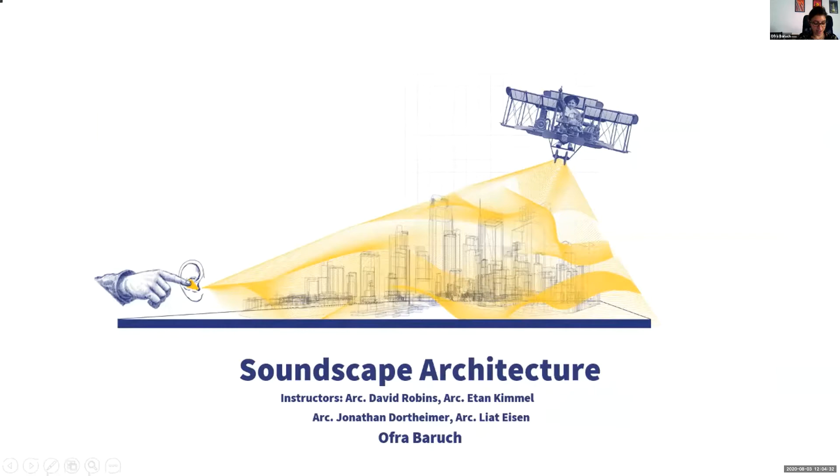I'm Ofra, and my project deals with architecture and its connection to soundscape. Our lives are always present in a sea of sound and voices. In the right architectural space, the human voice or music can be transformed in a way that can inspire faith, bring tears, and ease emotional pain.

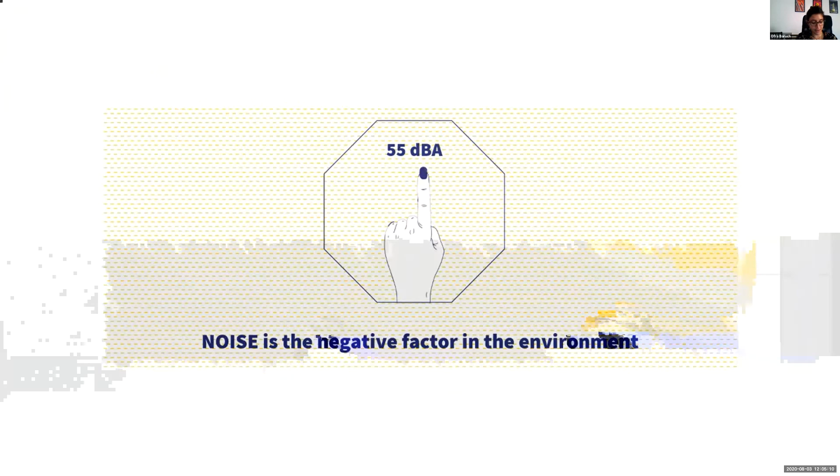Noise is an important aspect of the quality of life in the city and in general. Therefore, we should test the consequences of extreme noise nuisance. Over 55 decibels, noise is a negative factor of the environment. And as the noise increases, the negative reaction worsens.

The noise causes stress reactions, nervousness, attention problems, impaired activity in open spaces, feeling of helplessness, uncertainty, and impaired mental health. In general, noise at high intensities causes damage to a person's health, quality of life, and harms daily activities.

In recent decades, there has been a massive impact on the soundscape, and one of the most influential factors is air transport. An airplane approaches the airport, touches down on the runway, progresses to the terminal, discharges people, is refueled and refilled, taxis toward the runway, takes off, and departs to another destination. During each operation, the aircraft emits a high-intensity noise that significantly affects the soundscape.

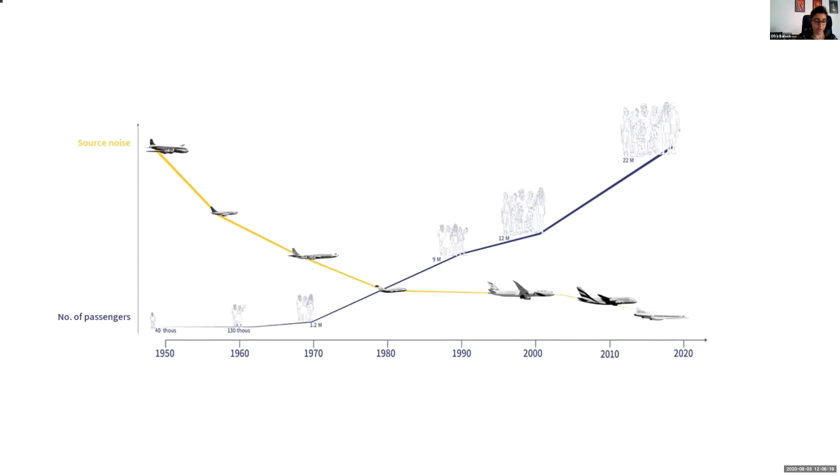So even though over the years the source noise has been reduced, the number of passengers and flights is steadily increasing, so the nuisance exists and probably will not go away in the coming years. At first, I wanted to examine how the nuisance issue is tackled.

From investigation conducted on the environment of airports around the world, it can be seen that there is usually a layer of land uses that serves as buffer zones. That is, a layer of uses that is not sensitive to noise, such as uncultivated land, industry, and the like. In Israel, there is not enough land to be used as buffer zones.

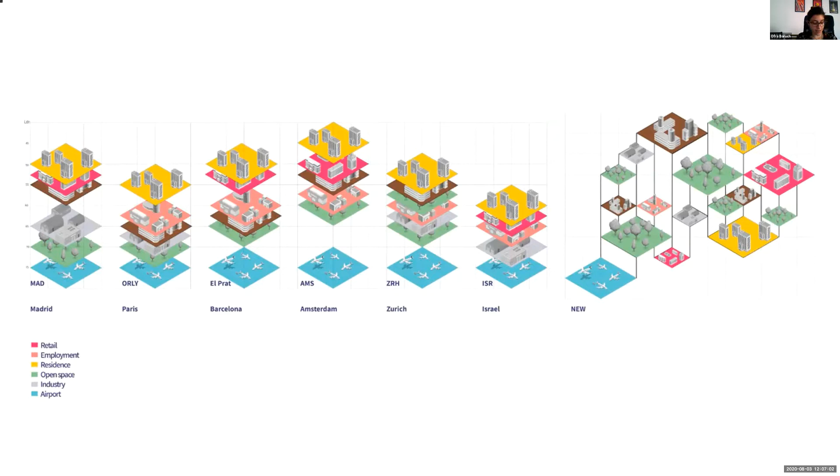My project offers a new insight into the space surrounding the airport, a space that suffers from severe noise nuisance, by dismantling land uses and using architecture to address the issue of living alongside noise.

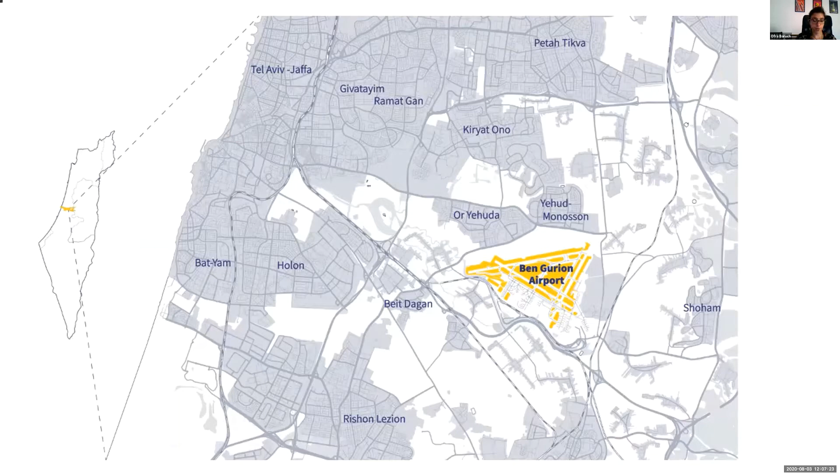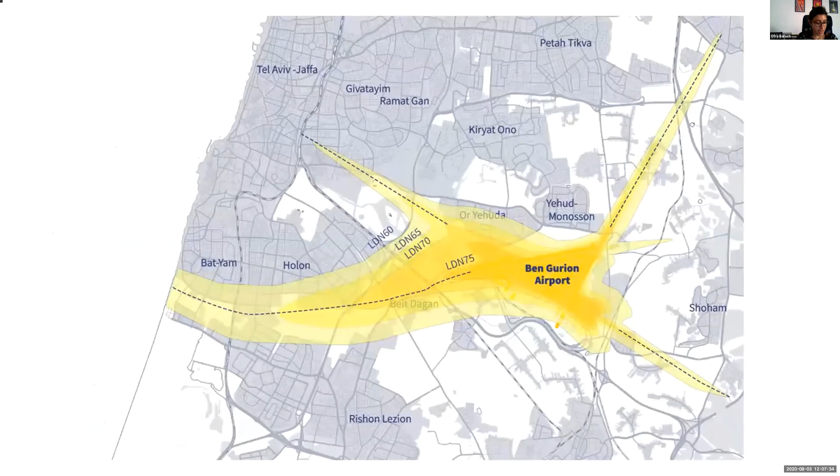In Israel, the largest international airport is Ben Gurion Airport, located in the center of the country. Zooming in, it's notable that the airport, which was established before the state declaration, nowadays is surrounded by highly populated cities and towns which are constantly growing. So, despite the relatively small physical size of the airport, the range of the noise influence is extensive and affects many cities in the heart of the country.

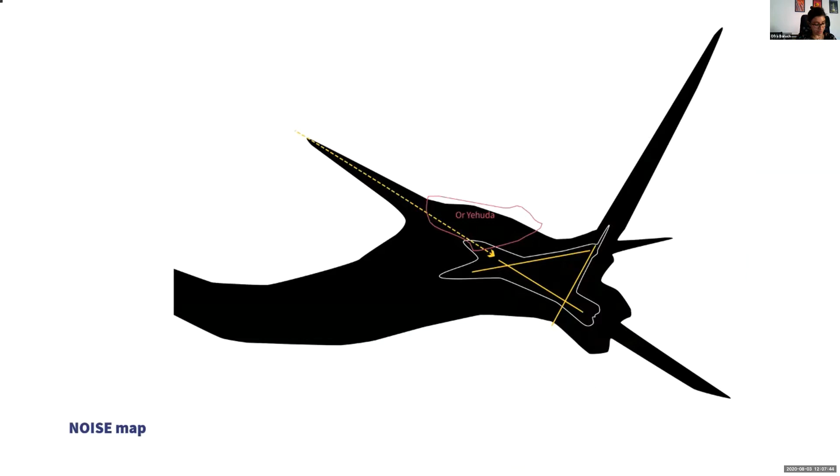One of the cities is Or Yehuda, which is located right next to the airport and is affected by nuisance frequently, as detailed later on. In an environment where many people suffer from high noise levels, there is a regulation aimed at preventing or reducing the impact of the annoyance.

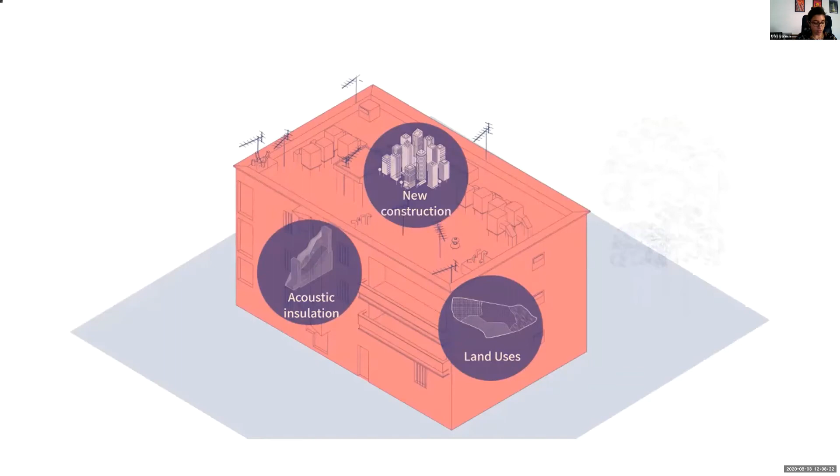In Israel, the regulation refers to areas affected by aircraft noise and defines the following conditions: restricting the locations of sensitive land uses, preventing approval of new noise-sensitive construction, and requiring acoustic insulation in bedrooms. All the regulation solutions are related to the interior only.

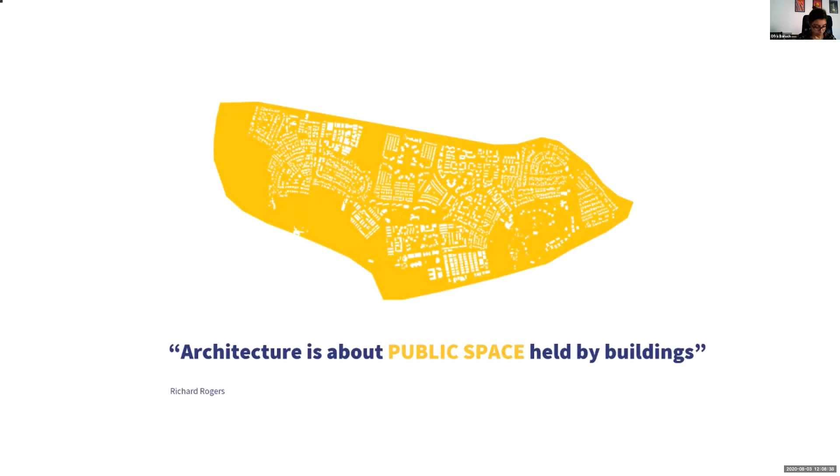By being outdoors, you are surrounded by unpredictable and unseen noise. In fact, there is a lack of any holistic view on the issue. There may be a situation with two neighboring buildings, one of which is eligible for acoustic protection and the other is not. And as we have seen, open spaces will not be entitled to any protection.

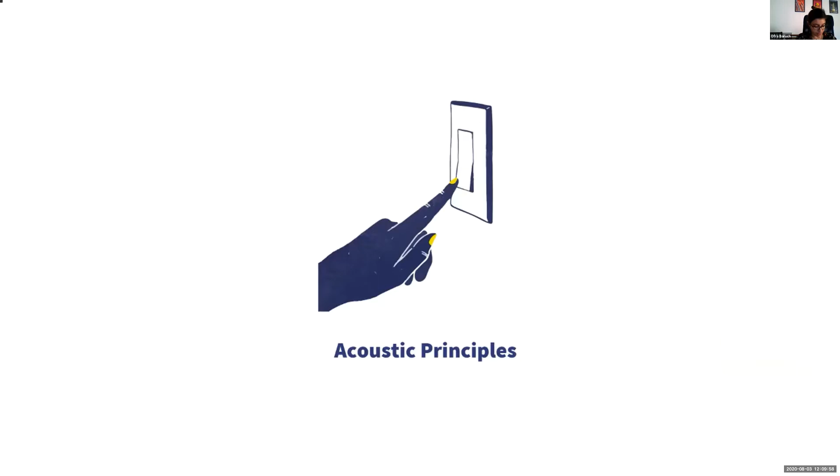Hence, the main question is, how can neighborhoods and buildings be designed to reduce the negative effects of extreme noise nuisance? In order to answer the question, I examined acoustic principles for the urban and building scale. I will review them shortly.

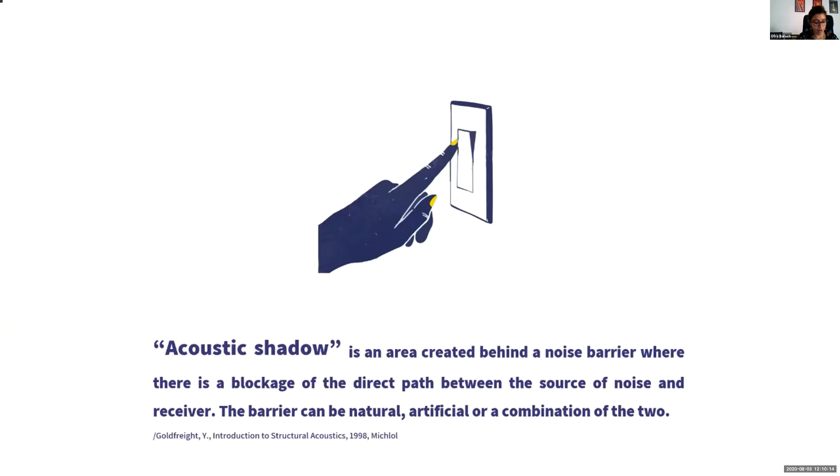The underlying acoustic principle is the acoustic shadow. Acoustic shadow is an area created behind a noise barrier where there is a blockage of the direct path between the noise source and the receiver. The barrier can be natural, artificial, or a combination of the two.

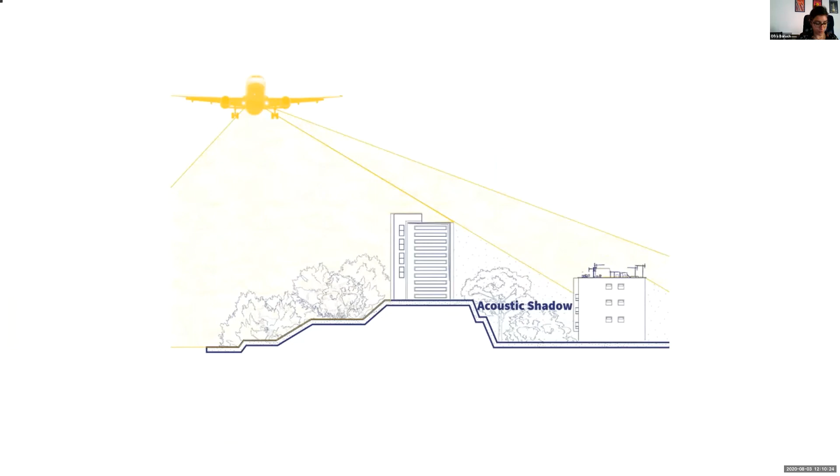The second principle is the building envelope in reference to the noise source, which aims to create protection for the open space near the building and prevent secondary sound repeats.

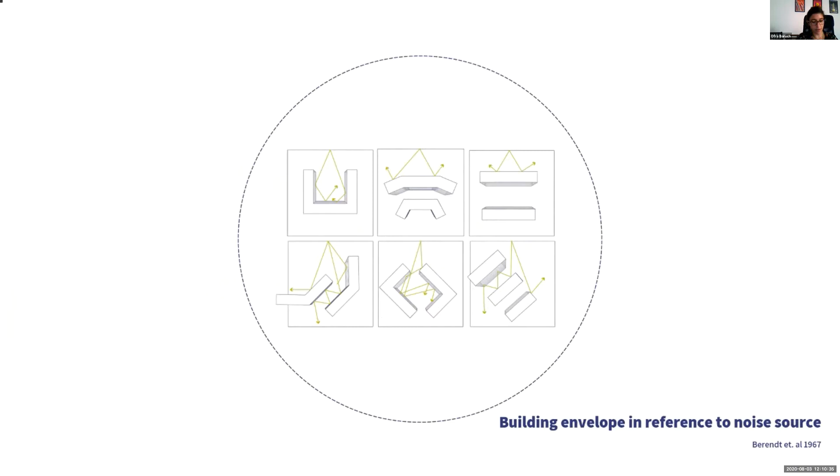The principle of construction height refers to the building's height, aiming to provide acoustic shade and prevent sound resonance.

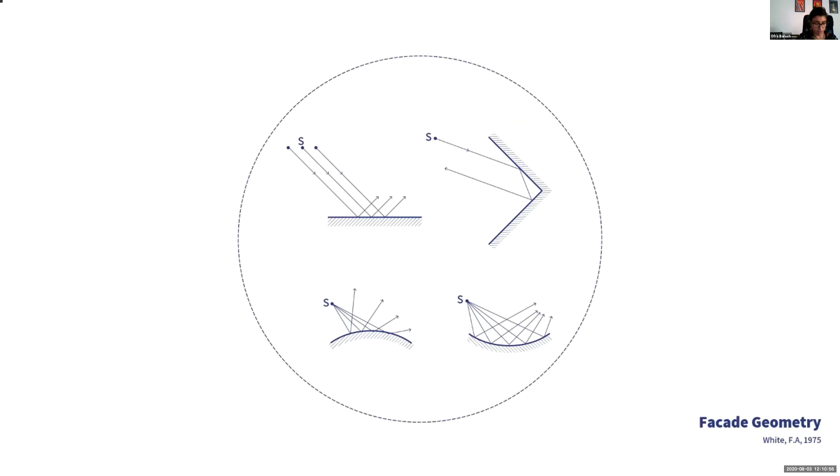The principle of design facade geometry aims to use geometric changes in the facade in reference to the noise source. It can also occur in a smaller scale.

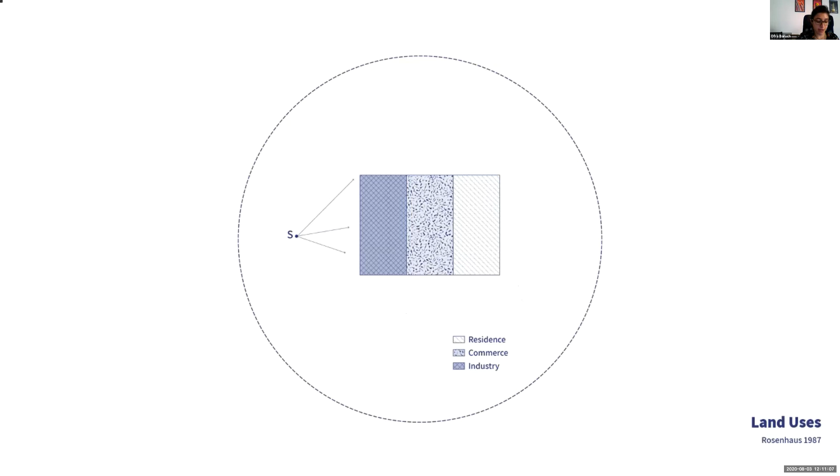As mentioned earlier, limiting sensitive land use planning and planning them according to the source of the noise. Sensitive land use refers to residences, educational institutions, nursing homes, and the like.

The fifth principle is construction materials, which refers to how it affects the acoustic environment.

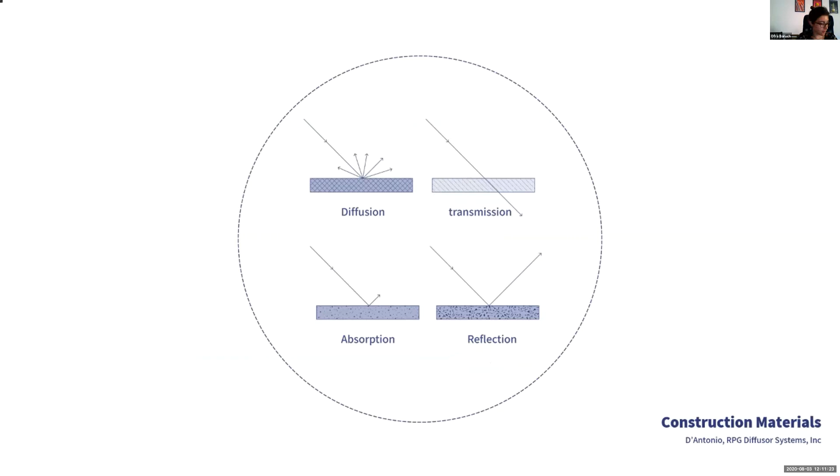There is no planning strategy that incorporates these different principles. Hence, my research proposes a soundscape urban planning strategy.

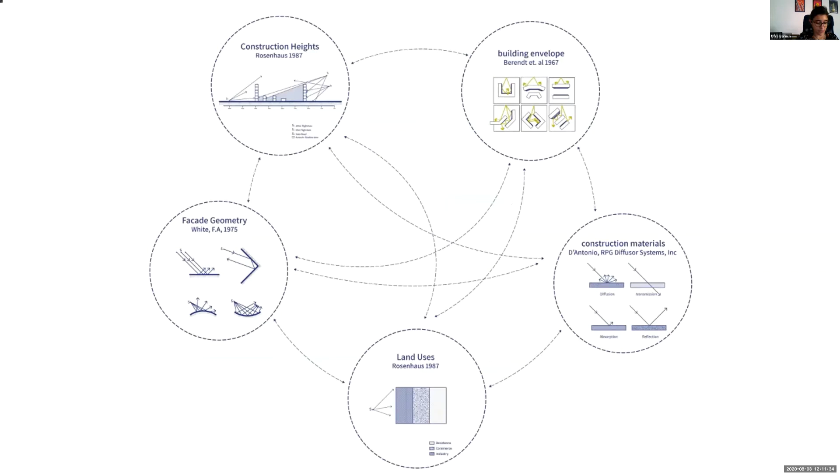I will shortly go through the strategy, detailed by a set of methods presented from the urban scale to the building: the acoustic urban grid, adjusting the urban grid parallel to the noise source direction to increase the potential of the acoustic barrier.

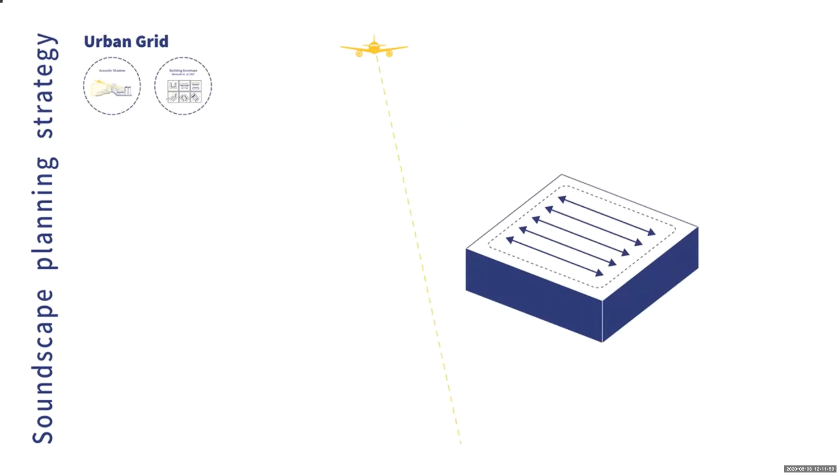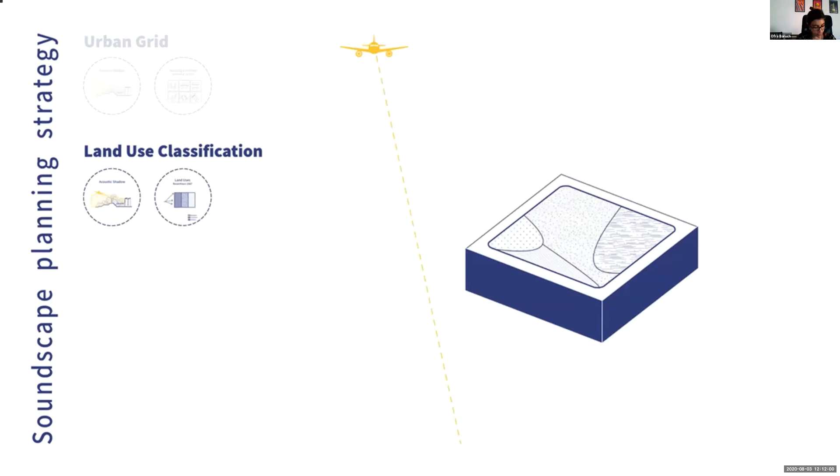Land use classification: on the urban scale, land use planning with reference to the noise source; and on the second scale, a mixed-use building where one use can protect the other.

Acoustic construction characteristics: use of the building envelope to prevent echoing and reverberations.

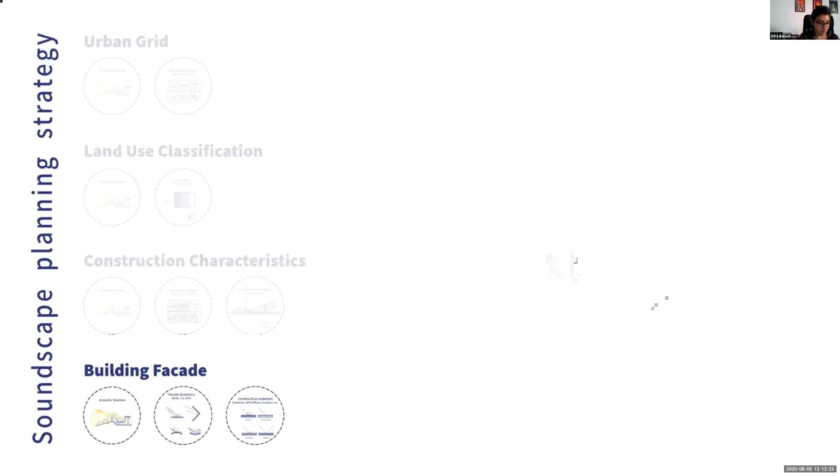The last stage, the acoustic building facade method: use of materials and directing of building facades in accordance to the noise source. And these are the full method working set.

As mentioned earlier, the project focuses on the city of Or Yehuda. I will present it from the urban to the building scale.

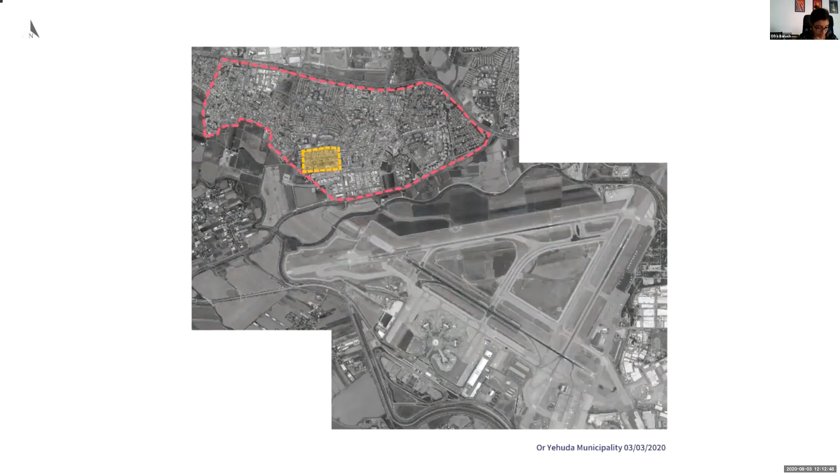According to noise contours taken from the airport's national outline plan, the residents suffer from noise nuisance constantly.

The criteria measurement is LDN. In general, it's the average sound level over a 24-hour period.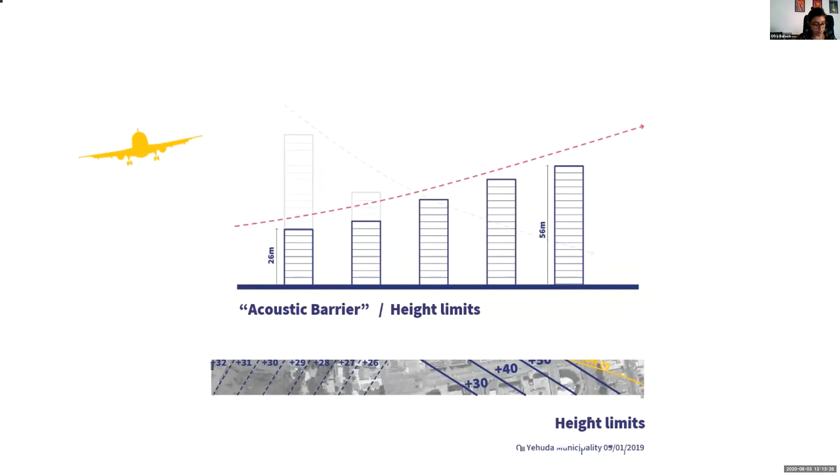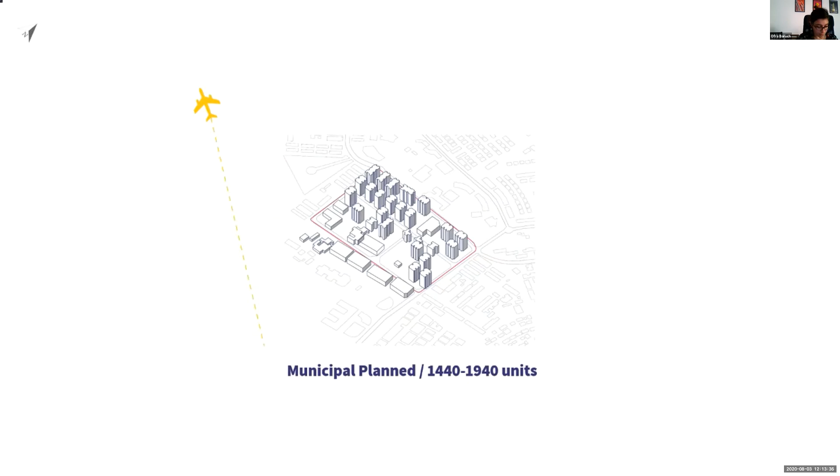Today, the neighborhood contains about 130 housing units, and according to the municipality's future planning, it will increase to 1,500 to almost 2,000 units, where the noise nuisance continues to be significant, according to a simulation done using 3D noise software.

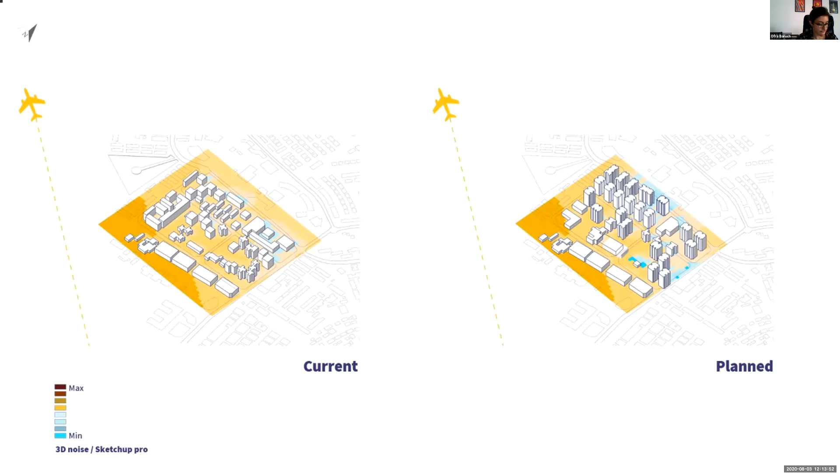Now I'd like to take you through the soundscape planning architecture strategy implementation. I will begin at the urban scale.

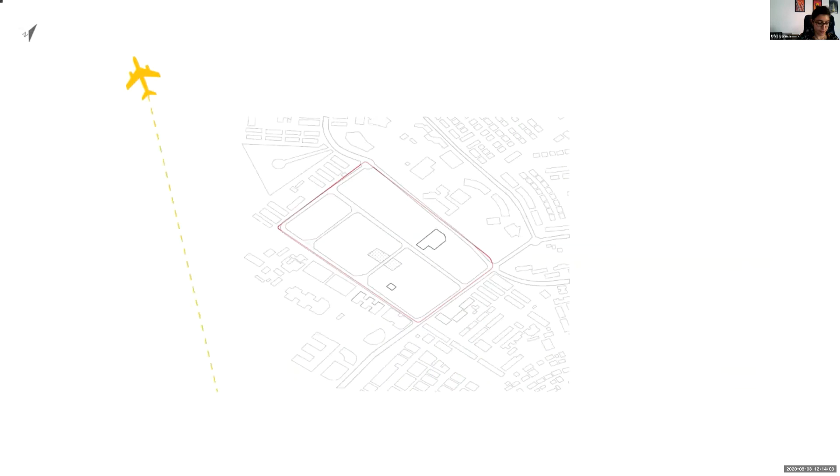This is the planning site, the Asirei Tzion neighborhood. In the neighborhood already exists the mall, a large public open space, educational and cultural institutes, and offices.

At first, we should apply the acoustic grid method. This is the basic acoustic urban grid on the site.

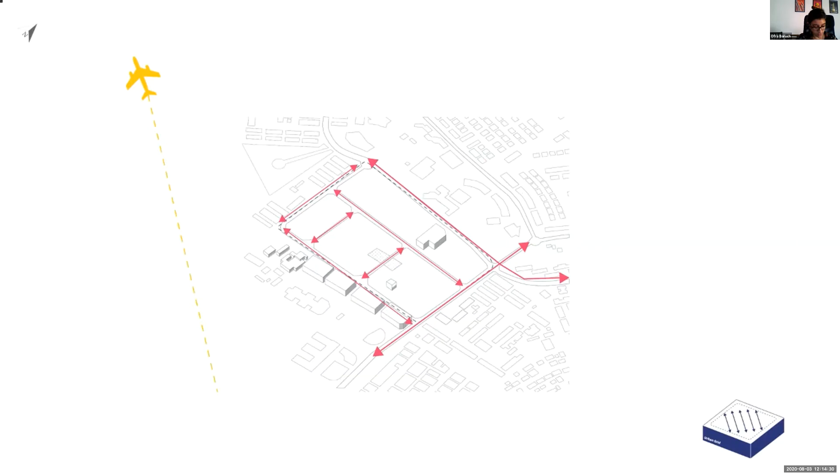At its present state, the neighborhood has an existing grid of streets and roads, and there is a need to adapt to and combine two grids. The combination of the grids produces a new planning system in the neighborhood, containing open spaces for useful, protected, green urban areas.

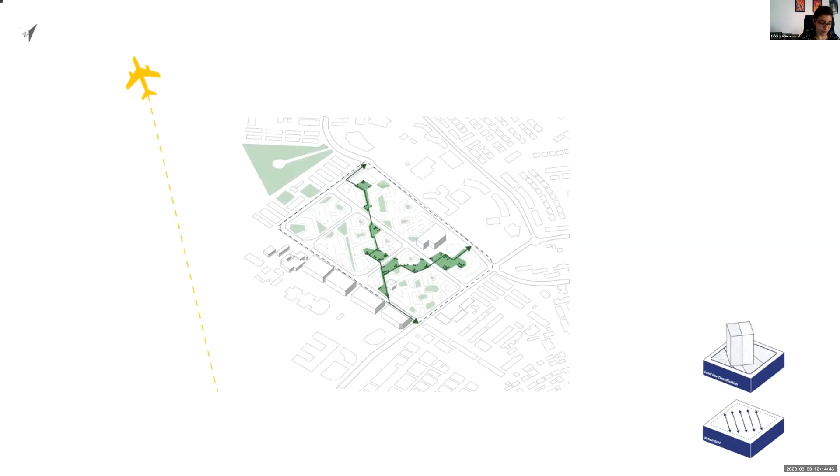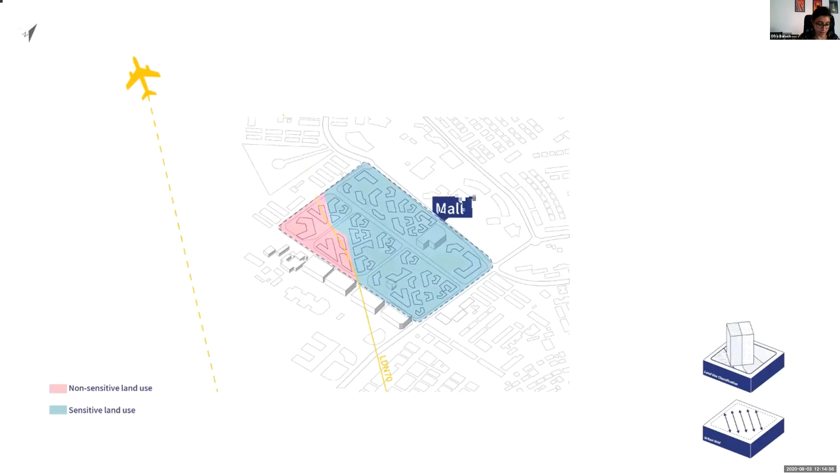The suggested plan is designed under the noise limits: no build of noise-sensitive uses under the LDN 70 line. Accordingly, non-sensitive land use, such as offices, is planned south of the LDN line.

The schematic master plan is designed according to the height limits and by maximizing the acoustic shadow.

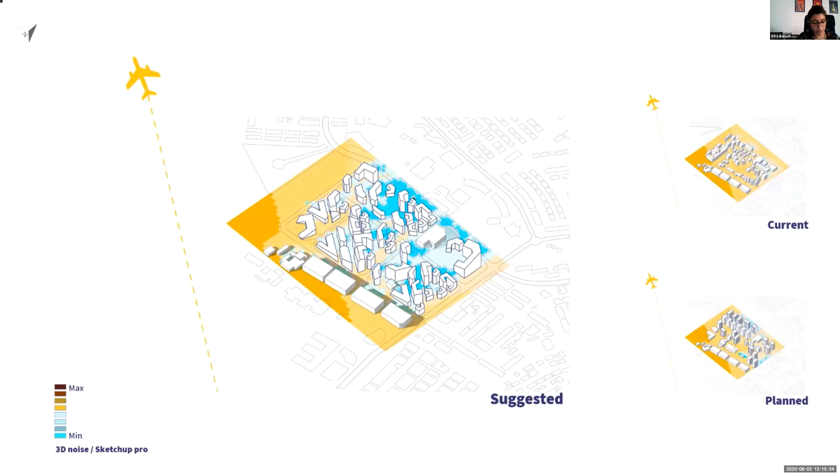Examining the planning scheme using 3D noise software, it is notable that the suggested scheme is more efficiently noise protected. It should be stated that the test results based upon the 3D noise software are rough, since existing tools do not address architects. Therefore, an architecture-fit software for soundscape performance is needed, such as Ladybug for sunshades.

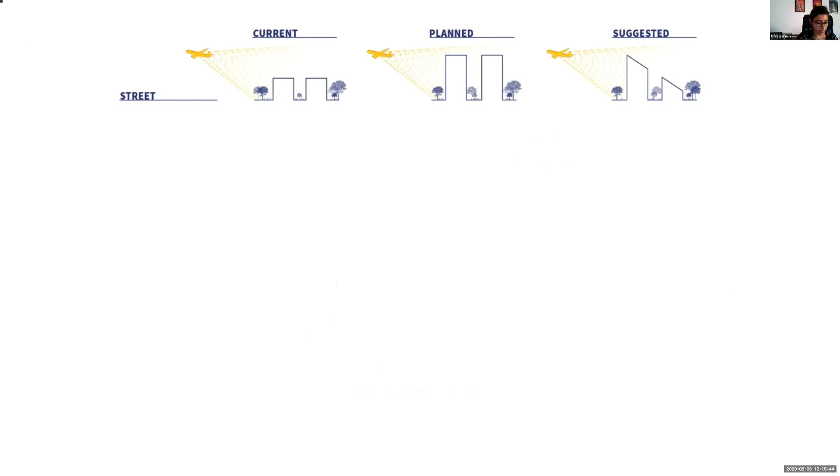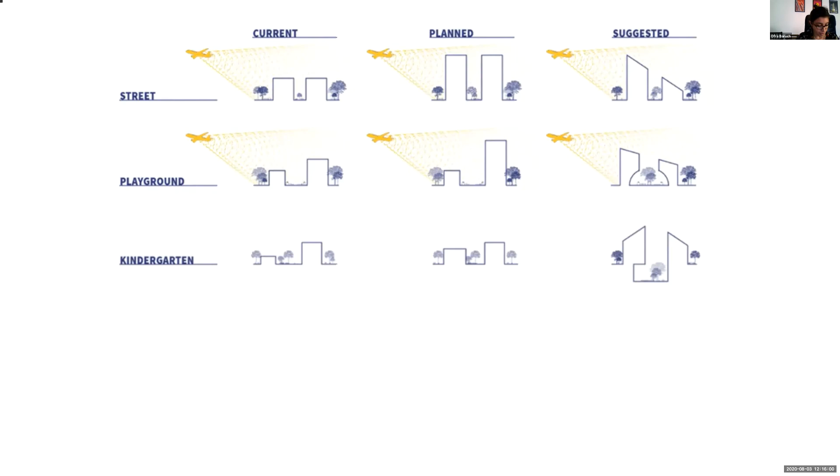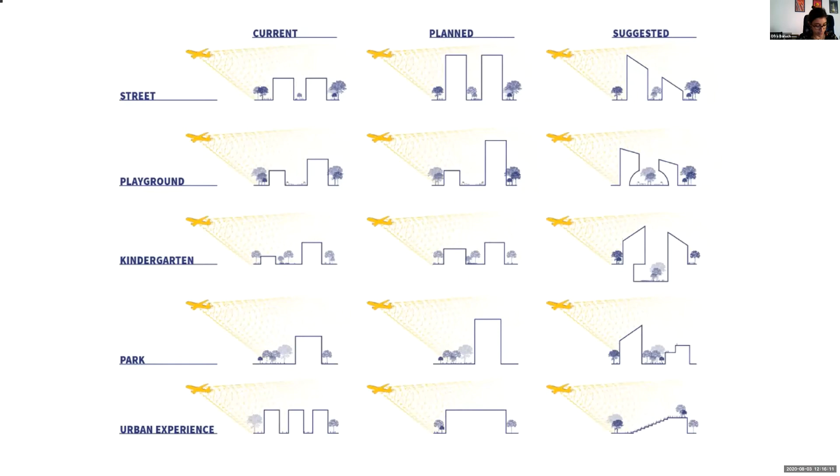Comparing the current planned and suggested scheme of the street or playground, only the suggested design addresses the noise nuisance and offers a different design. The street offers a noise-protected path, and the building surrounding the playground contains its noise. More city situations can be successfully architecturally designed with a challenging soundscape. We can choose to embrace the unique urban experience instead of ignoring the challenge or fleeing from it.

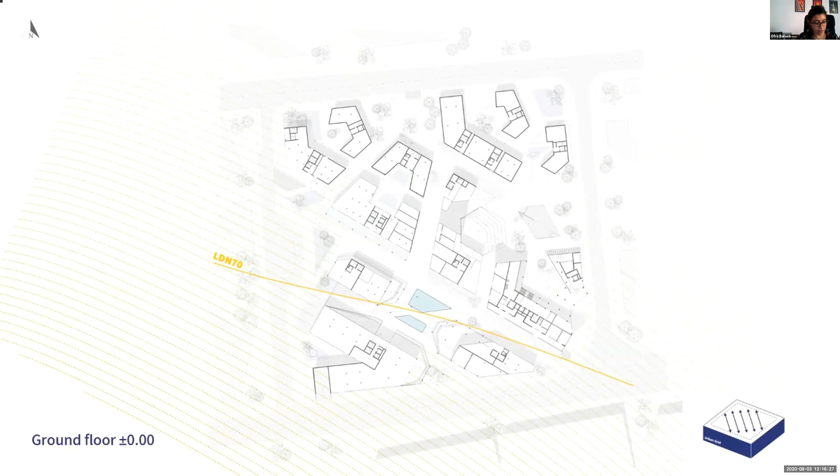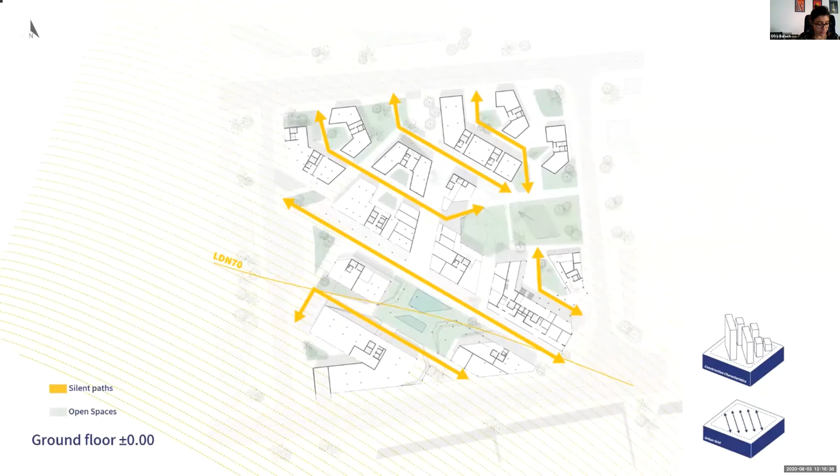So what is the experience in a soundscape architecture design place? It requires a different building layout, considering the noise source direction and trying to prevent echoing and reverberations. It allows for wandering in a quiet path with connection to the city, and offers noise-protected open spaces.

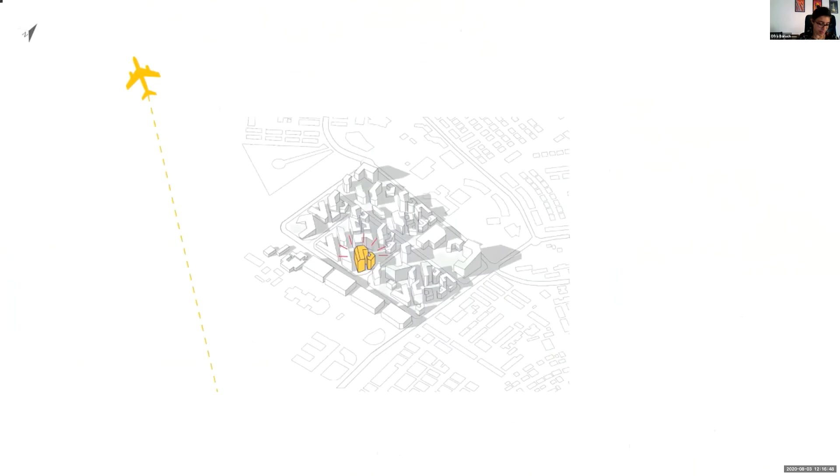Now we will move on to the scale of the building, designed by the same soundscape planning strategy, chosen for its location next to offices, residents, between noise and city grids, new and old parks.

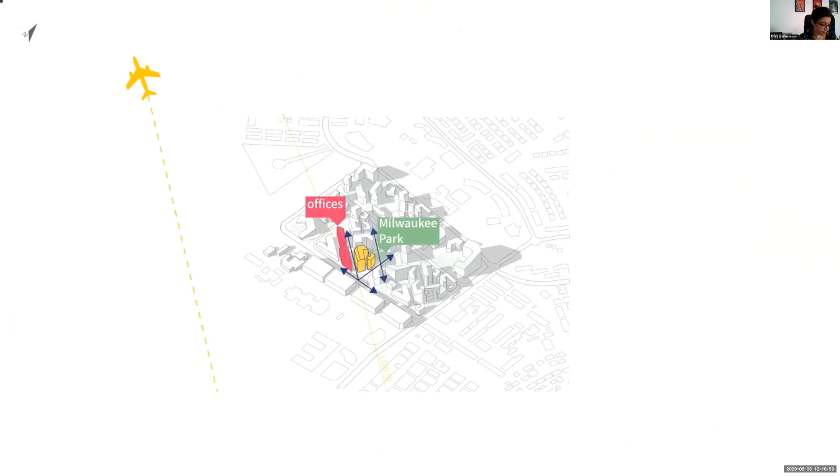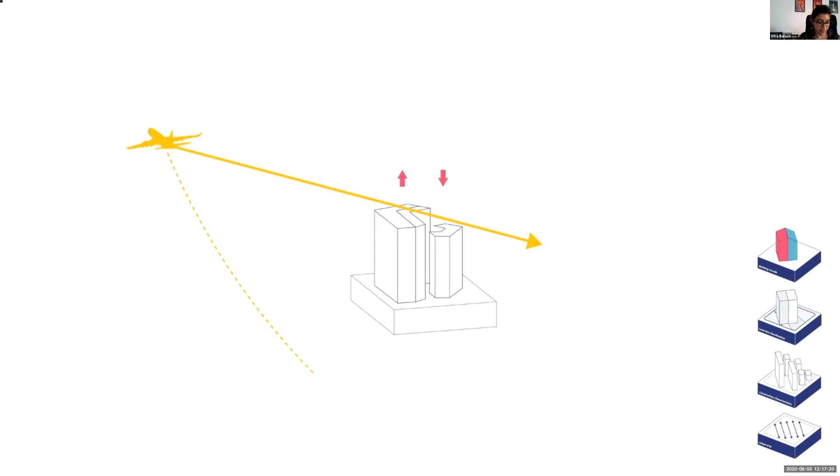The process begins with a given plot, then raising the desired or possible building height, planning the protected open space for achieving building boundaries. Then classify its facade according to noise-sensitive use, and afterward adjust building heights according to the noise source direction and its facade angles.

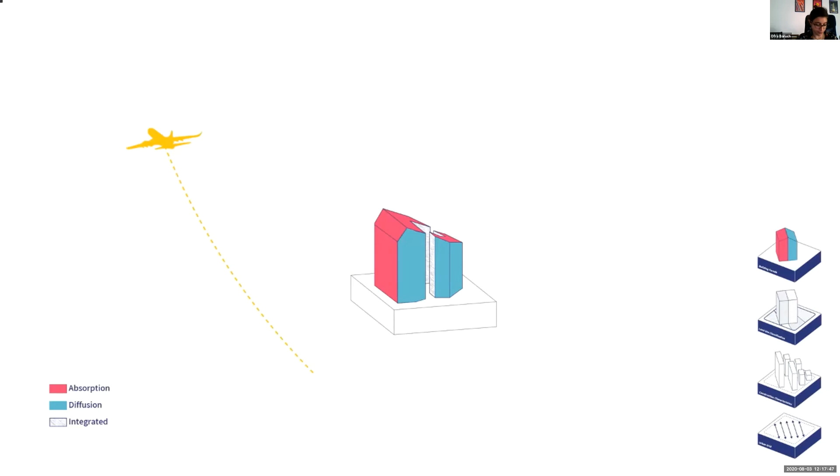Then consider additional factors such as climate. According to the planning strategy, adapt facade materials, combining different materials to create ventilation contact with the exterior, such as glass, which creates sound reflections, plus absorbent materials that can prevent unnecessary sound repetitions. All this for the design of a noise-sensitive building.

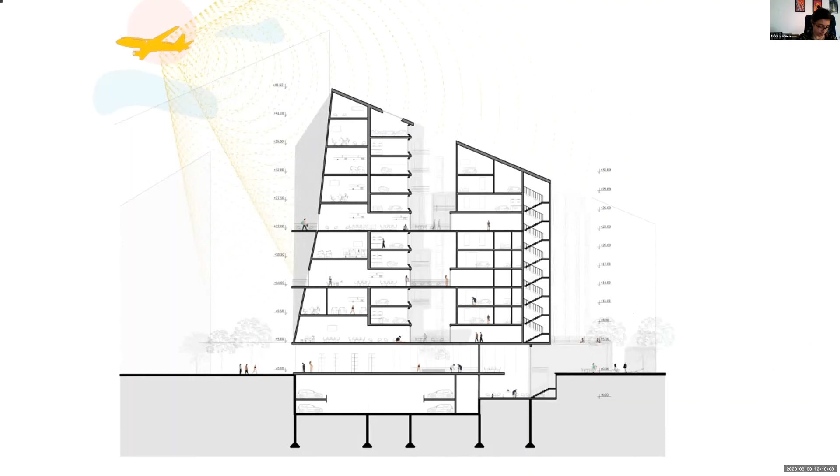In the building articulation, I also try to consider the noise produced by different programs. The building incorporates a hybrid design according to the noise source, containing open spaces, offices, residences, commerce, and public uses, for the purpose of protecting the sensitive uses both inside and outside the building, creating a noise-protected open space while connecting with the ground floor, the existing Milwaukee Park, and street life.

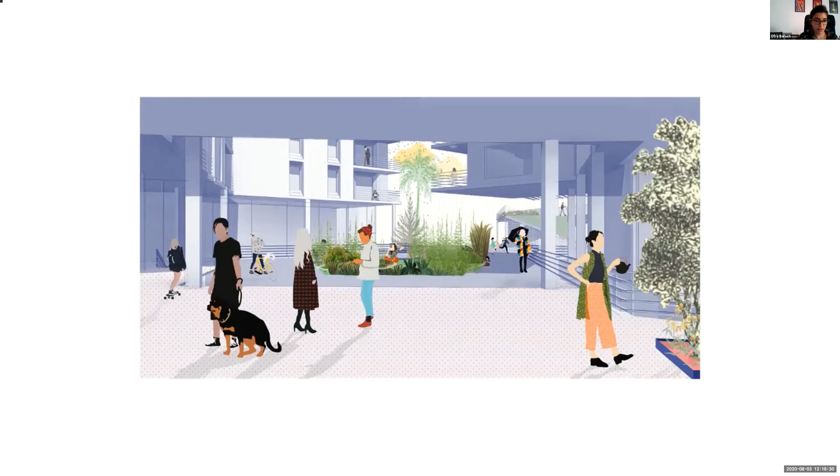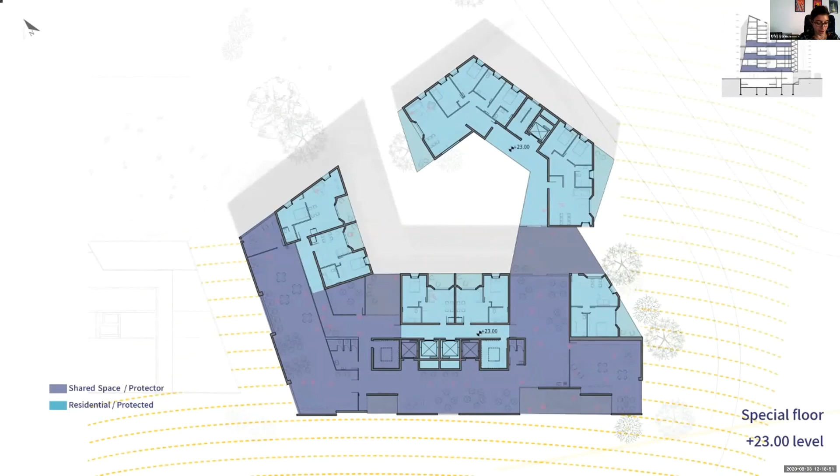The building is designed according to the soundscape strategy, enabling a new interface between offices and residents, offering a special floor plan that creates shared spaces to add protection to the residential areas. In this special floor, the planned residences are relatively small housing units for a younger population who can work and live in the same space while sharing life with the building and the city.

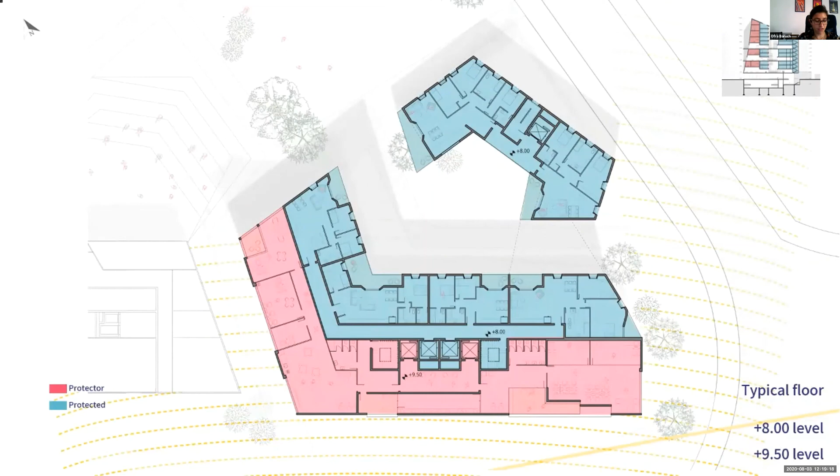On the typical building floors, where apartments are designed for small families, it is possible to create a separation between the uses for privacy, while gaining noise protection from the office part.

The office facade is designed differently than what we are used to, unlike typical curtain wall facades, since those are not suitable for construction alongside noise nuisance due to the reflection created by glass. Instead, absorbent materials were used to prevent some of the sound reflections, for the purpose of hiding the glass and preventing a parallel facade that can produce a lot of resonance, the facade was designed as a system of folds.

Thus, creating a place and a path for office users who may also need a quiet rest outside. Entering the building is through a quiet path connecting the quiet open space to the building.

On the ground floor, additional programs are planned that may affect the building's internal soundscape, such as the gym and the kindergarten, where the noisy spaces of these programs are planned underground, but allow access to the internal open space and exit to Milwaukee Park and the city. At the same time, the open space design allows urban life protected from aircraft noise, and when producing noise of its own, it's done consciously.

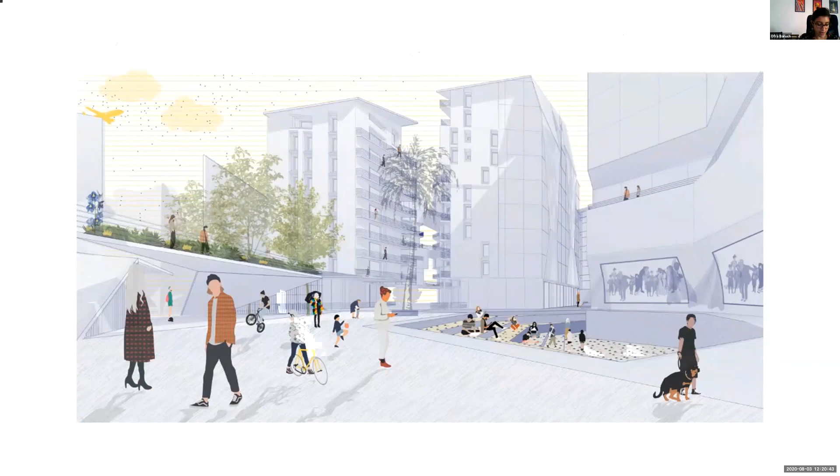In the residential areas, the facade is planned as a non-uniform facade, which produces sound diffusion through building shifting in order to prevent reverberation in the inner courtyard. Thus, different and varied envelope building sections are designed to break the corresponding facade cross-section.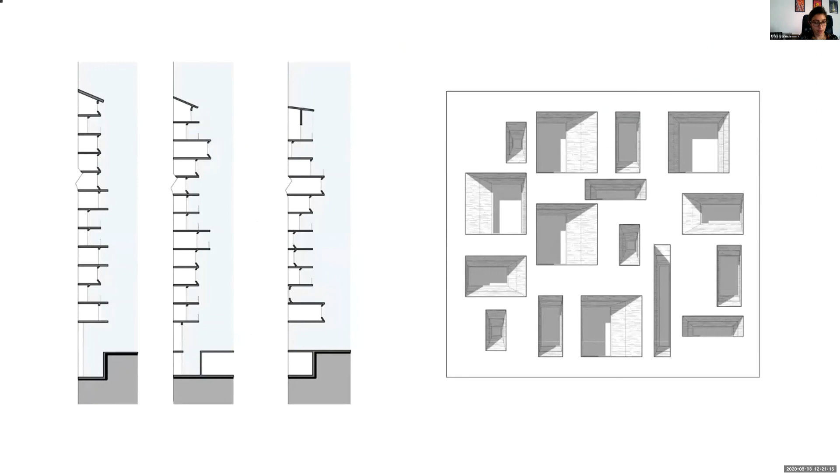This technique is also implemented at a smaller scale, such as in window openings that are slightly angled inwards, in order to produce an absorbent envelope, which will prevent some of the reflection formed by the glass.

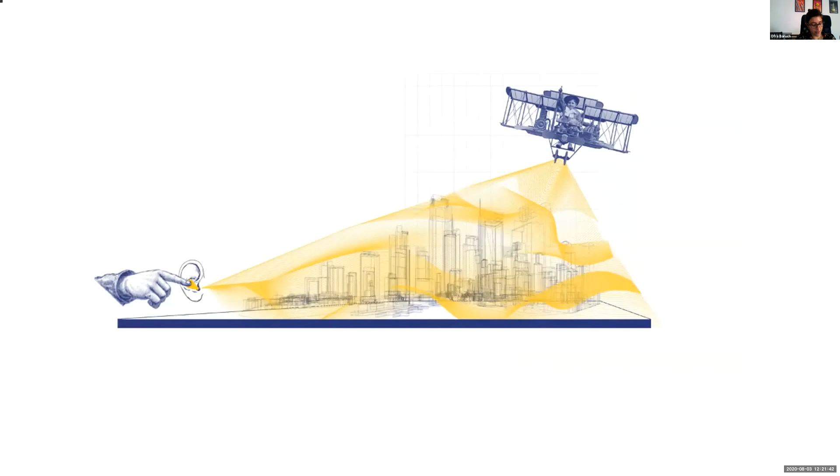By implementing the sound planning strategy, we can create a quality of life next to a noise nuisance. In a noisy modern life, there is great importance to consider the soundscape. I think it's essential to raise awareness to the soundscape aspect in the architectural design process.